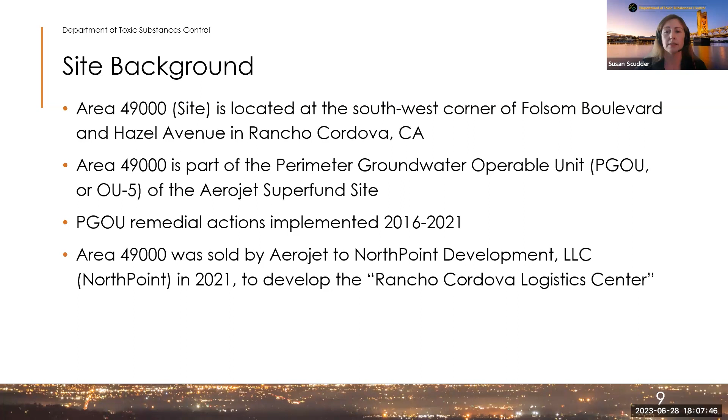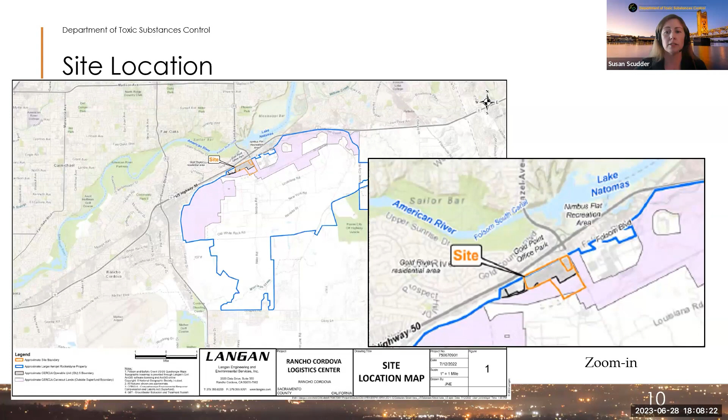The property owned by NorthPoint and being developed as the Rancho Cordova Logistics Center is shown in orange outline. And the gray portion within the orange outline is Area 49,000 of the Superfund site. The shaded light purple portion shown on these maps is called the carve-out lands, which are not part of the Aerojet Superfund site. Next slide.

Site history and use. From the late 1800s to the early 1900s, there were historic gold dredging activities on this land and much of the rest of the Aerojet Superfund site. Starting in the 1950s, Aerojet began operating at Area 49,000. At the height of operations in the 1960s and 70s, there were as many as 28 separate buildings on the site. Activities performed included rocket motor parts manufacturing, non-destructive testing, cleaning and degreasing, bulk chemical storage, and other industrial machining.

Chemical tanks and drums, sumps, fuel tanks, and wastewater drainage ditches were some of the historical features identified for the site. In the 1980s and 1990s, most of these operations shut down and most of the buildings were demolished. Currently, there is just one building remaining, called Building 49011, and it is planned for eventual demolition as part of the redevelopment. Next slide.

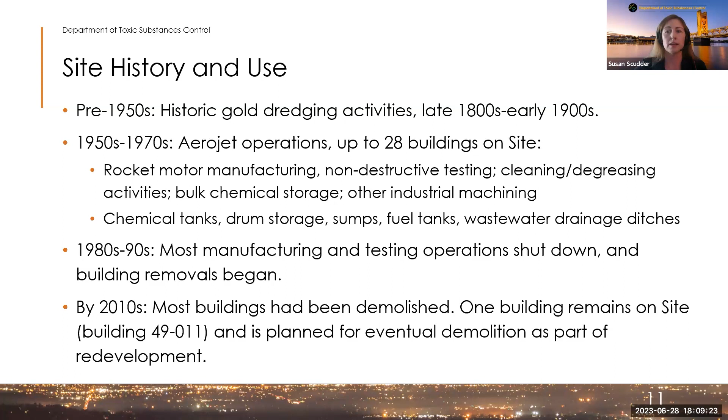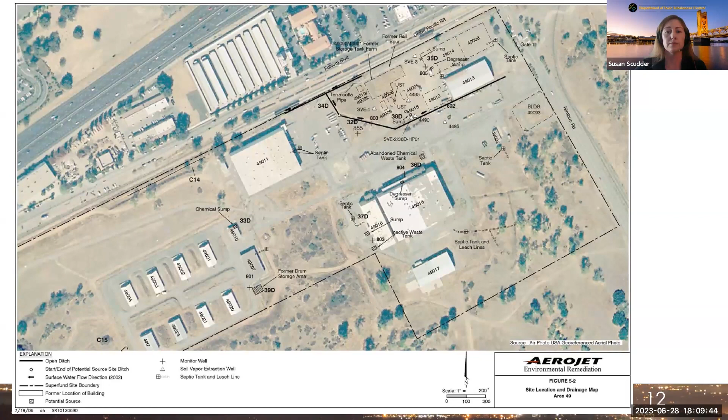Regulatory history. As mentioned, Area 49,000 is part of the PGOU of the Aerojet Superfund site. The Aerojet site was added to the National Priorities List, or NPL, in 1983. US EPA is the lead agency on NPL sites, supported by DTSC and the Water Board. In 2009, the PGOU remedial investigation was completed.

In 2011, US EPA issued Records of Decision, or RODs, for the PGOU. There are two RODs, an interim ROD for groundwater and a final ROD for soil. The interim ROD for groundwater includes active groundwater remediation in the PGOU, which is ongoing, and protection of human health and the environment through the implementation of land use covenants to restrict exposure to and use of contaminated groundwater.

The final ROD for soil included performing soil vapor extraction, or SVE, for the central portion of Area 49,000, followed by land use restrictions if contamination remained in soil and soil vapor at unsafe levels once the SVE was completed. Next slide.

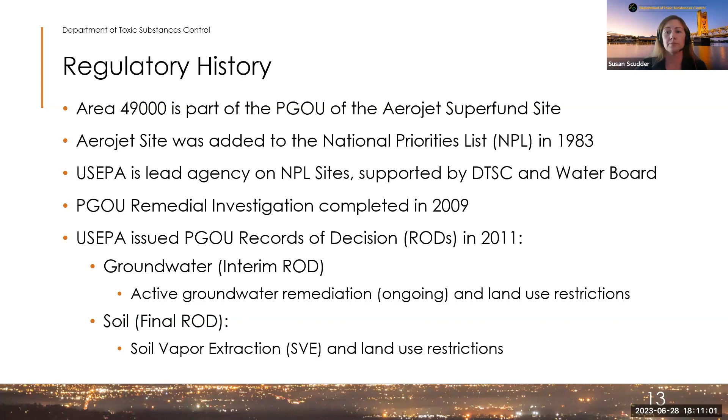The SVE system was designed to remove volatile organic compounds, or VOCs, from soil vapor in the vadose zone beneath the central portion of Area 49,000. It operated from January 2016 to December 2019 under agency oversight. According to the Remedial Action Completion Report prepared by Aerojet's consultant, Stantec, the SVE system reduced VOC concentrations in the influent by 96%, removed 499 pounds of VOCs, including over 320 pounds of trichloroethene, or TCE, and had reached asymptotic removal rates prior to being shut down.

The agencies reviewed the Remedial Action Completion Report, and US EPA issued an approval letter for the SVE system, indicating the SVE remedy was complete, but that the ROD soil remedy would not be complete until land use restrictions were recorded for the site. Next slide.

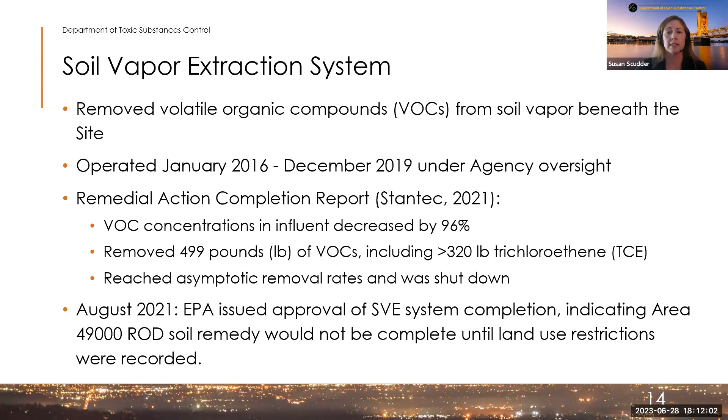Two land use covenants, or LUCs, were recorded in December 2021 as required by the US EPA RODs. A groundwater-related LUC restricts groundwater access and use to prevent exposure to contaminated groundwater remaining underneath the site.

A soil vapor LUC restricts the land use to commercial and industrial uses only and requires any new buildings built on the land to have appropriate vapor mitigation measures to prevent exposure of occupants to potential intrusion of VOC vapors. It also requires a DTSC approved soil management plan prior to soil disturbance activities. Next slide.

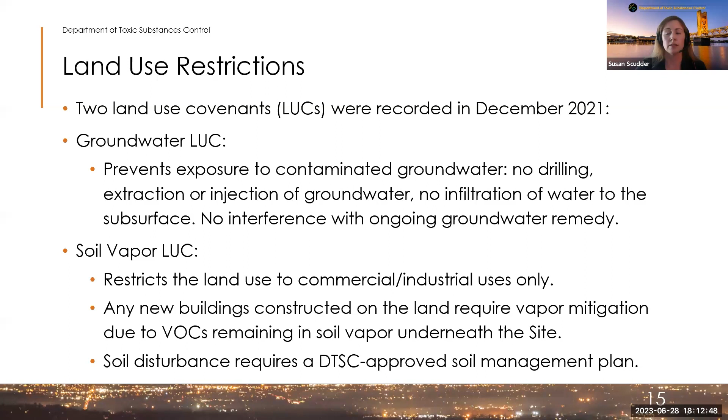Regulatory oversight. DTSC is now the lead agency for executing and implementing the LUC requirements. Since NorthPoint purchased the land to build new buildings, DTSC is now working with NorthPoint directly on determining the appropriate type of vapor mitigation measures for their planned buildings, as required by the Soil Vapor LUC.

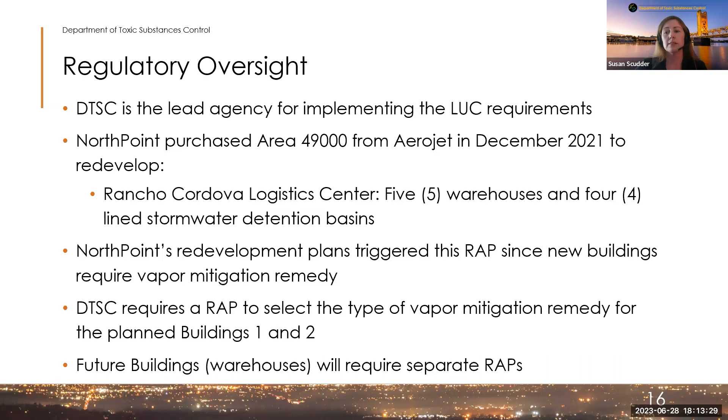DTSC requires a remedial action plan in order to select the type of vapor mitigation remedy for buildings 1 and 2, which are the only buildings scheduled for development at this time. Future warehouses on Area 49,000 will require separate remedial action plans. Next slide.

This figure shows the site plan for the Rancho Cordova Logistics Center. The 5 planned warehouses are shown as dashed purple outlines. The labels for buildings 1 and 2 are highlighted. There are also 4 stormwater detention basins shown in blue that are part of the redevelopment plans. Next slide.

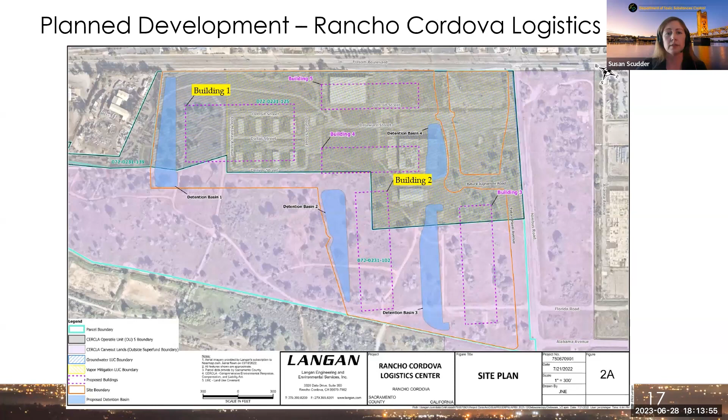Contaminants of concern and exposure pathways. The contaminants of concern and exposure pathways for the site are as follows. VOCs in soil vapor beneath the site could accumulate under buildings and intrude into indoor air. For surface soil, the soil quality was tested and determined to be acceptable for commercial and/or industrial use. The LUC restricts land use to these types and requires a DTSC-approved soil management plan prior to any grading or soil disturbance.

For groundwater, VOCs, perchlorate, and N-nitrosodimethylamine, or NDMA, are found in groundwater beneath the site. The depth to groundwater is approximately 40 to 50 feet. Exposure to groundwater is restricted by the existing groundwater LUC. The PGOU interim ROD groundwater remediation is ongoing, and consistent with the groundwater LUC, the stormwater detention basins will be constructed with liners to prevent infiltration of water to the subsurface. Next slide.

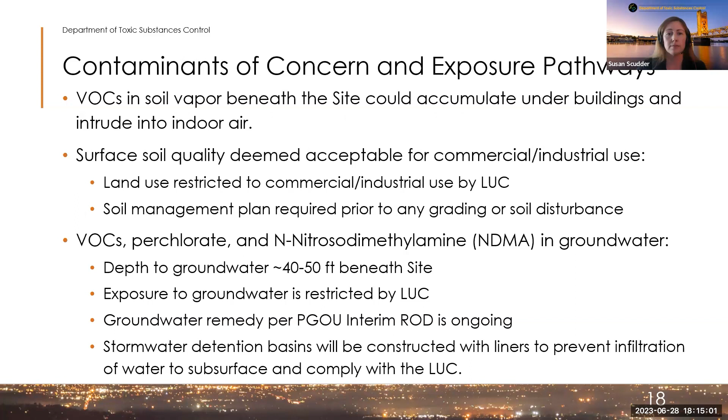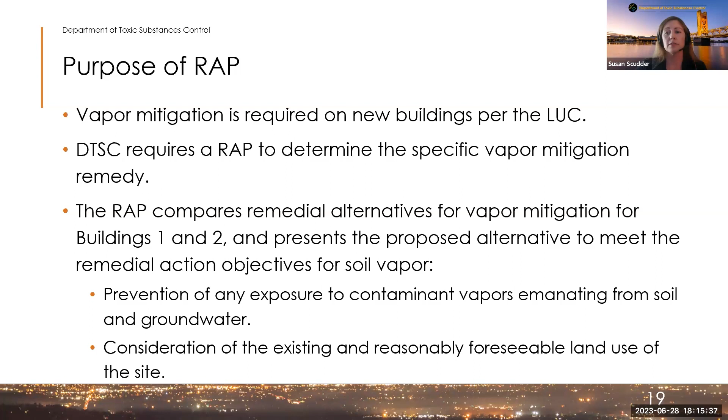Purpose of this RAP. Vapor mitigation is required for any new buildings constructed on the site for human occupancy, per the existing LUC. DTSC requires a RAP to determine the specific vapor mitigation remedy. This RAP compares remedial alternatives for vapor mitigation for buildings 1 and 2, and presents the proposed alternative to meet the remedial action objectives for soil vapor, which include prevention of any exposure to contaminated vapors emanating from soil and groundwater, and consideration of the existing and reasonably foreseeable land use of the site. Next slide.

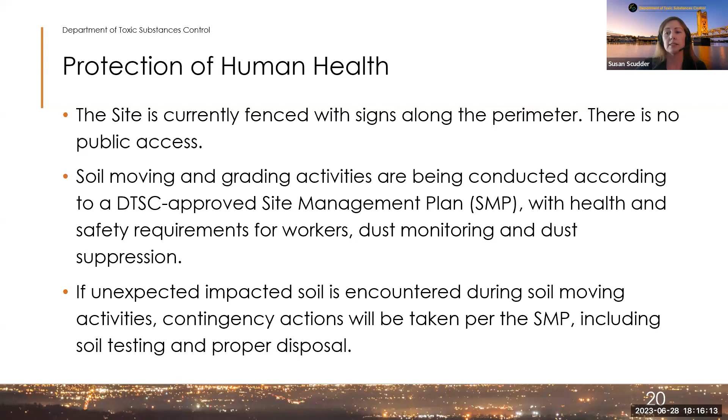Protection of human health. The site is currently fenced with signs along the perimeter. There is no public access. Soil moving and grading activities are being conducted according to a DTSC-approved site management plan, with health and safety requirements for workers, dust monitoring, and dust suppression. If unexpected impacted soil is encountered during soil moving activities, contingency actions will be taken per the site management plan, including soil testing and proper disposal. Next slide.

3 remedial alternatives were evaluated in the RAP for vapor intrusion mitigation. The first alternative is no action, which is an alternative that is required by regulation to be evaluated for comparison purposes. This alternative is in violation of the existing soil vapor LUC and is not protective of human health and is not an acceptable alternative for the site. The second alternative is a passive vapor mitigation system with active contingency. The third alternative is a sub-slab depressurization system, or SSDS.

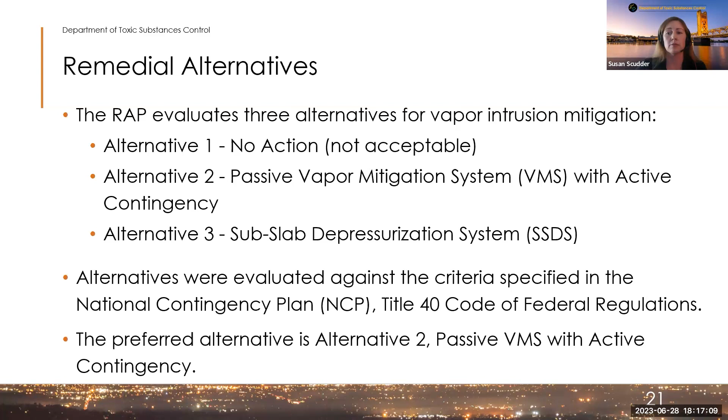The remedial alternatives were evaluated against the 9 criteria specified in the National Contingency Plan, Title 40 of the Code of Federal Regulations. Based on the evaluation criteria, the preferred alternative is Alternative 2, Passive Vapor Mitigation System, or VMS, with active contingency. Next slide.

This passive vapor mitigation system would be incorporated into the construction of each building. This would consist of a vapor barrier membrane underneath each building slab, horizontal piping below the slab connected to risers that extend to the building roof, and wind-assisted turbines on the top of each riser at the roof that would induce a vacuum on the piping network. Next slide.

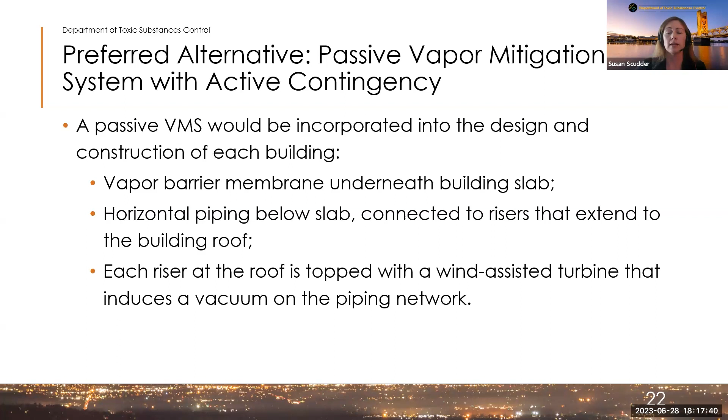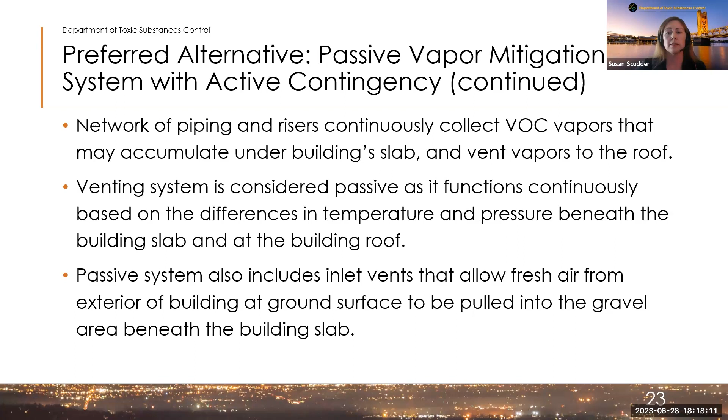The network of piping and risers continuously collects VOC vapors that may accumulate under the building's slab and vents vapors to the roof. The venting system is considered passive as it functions continuously based on the differences in temperature and pressure beneath the building slab and at the building roof. This passive system also includes inlet vents that allow fresh air from the exterior of the building at ground surface to be pulled into the gravel area beneath the building slab. Next slide.

Based on soil vapor VOC concentrations, passive VMS is expected to be more than sufficient to prevent exposure to contaminated vapors in indoor air. However, if VOC concentrations in indoor air samples during passive VMS operation are elevated above DTSC-approved threshold values due to vapor intrusion, the system will be converted to active. This will be done by installing power-assisted electrical blowers on each of the vent risers at the roof to induce higher vacuum and air exchange rate.

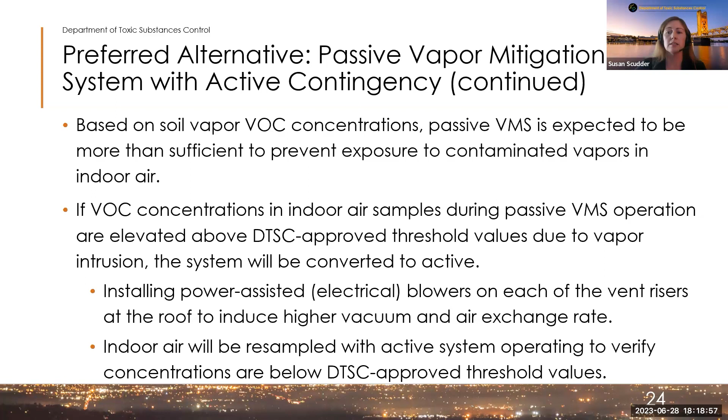Indoor air will then be resampled with the active VMS operating in order to verify indoor air concentrations are below the DTSC approved threshold values. Next slide.

Ongoing protection of human health. Once the VMS is in place and the building constructed, there will be testing of the indoor air to confirm it is clean prior to allowing building occupancy. Ongoing operation and maintenance, or O&M, of the VMS in accordance with DTSC approved O&M plans and O&M agreement.

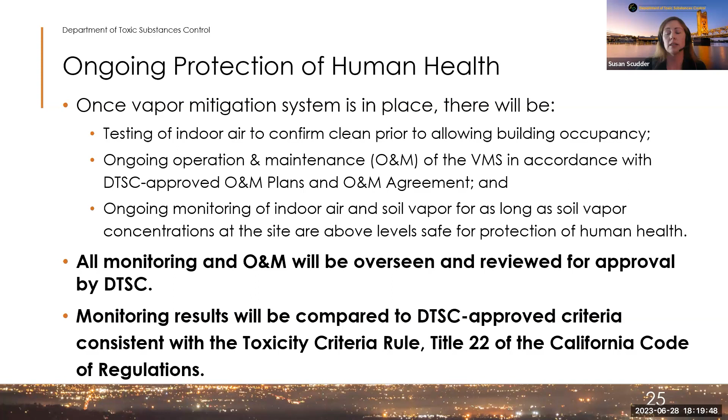And ongoing monitoring of indoor air and soil vapor for as long as the soil vapor concentrations at the site are above levels safe for protection of human health. All monitoring and O&M will be overseen and reviewed for approval by DTSC. Monitoring results will be compared to DTSC approved criteria consistent with the toxicity criteria rule, Title 22 of the California Code of Regulations. Next slide.

Here's the tentative project timeline. On July 13th, 2023, the public comment period for the draft RAP will end. From July to August 2023, DTSC will respond to comments received on the draft RAP and work with North Point to revise the RAP if needed based on those comments. In August 2023, the RAP should be finalized, and a public notice will be issued for the final RAP.

In late 2023, the remedial design plan will be finalized and the buildings constructed with the VMS. Following construction, there will be post-construction completion reports submitted to DTSC for review. Pre-occupancy indoor air monitoring will be conducted and the results reviewed for approval by DTSC prior to allowing the buildings to be occupied. Moving forward, there will be indoor air and soil vapor sampling, quarterly for 1 year, semi-annually for years 2 and 3, and annually thereafter.

DTSC will also review annual LUC inspection reports to verify there are no activities being conducted inconsistent with the LUCs. And we will also have 5-year review reports on the site to ensure the continued protectiveness of the remedy. Next slide.